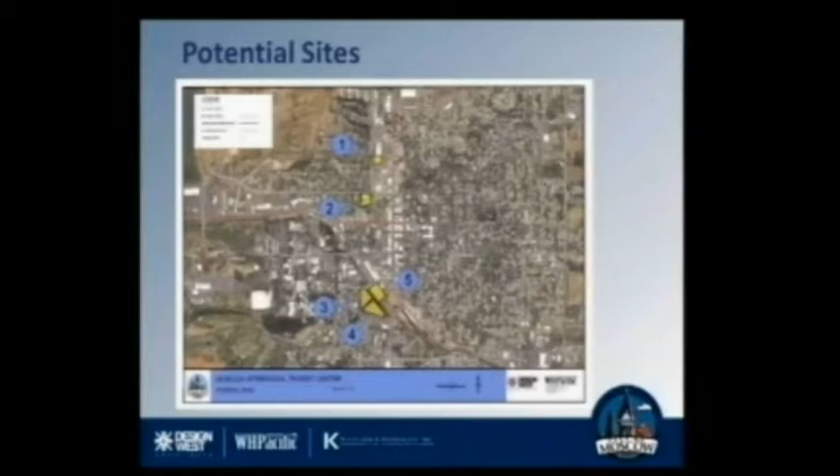We evaluated each one of those in detail, and then the Technical Advisory Committee looked and voted, see your dots there, their preference in regards to the sites. So you can see sites 3, 4, and 5 were really the predominant favorites.

We elected to look at essentially site 3 and 5 as the final 2 that we wanted to look in further detail and do a preliminary design on. Site 3 within the University of Idaho land, and then site number 5 in a recently redeveloped private parcel.

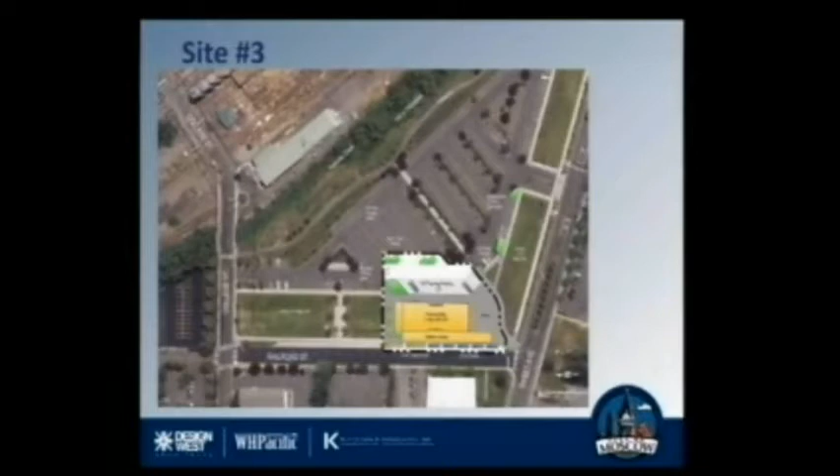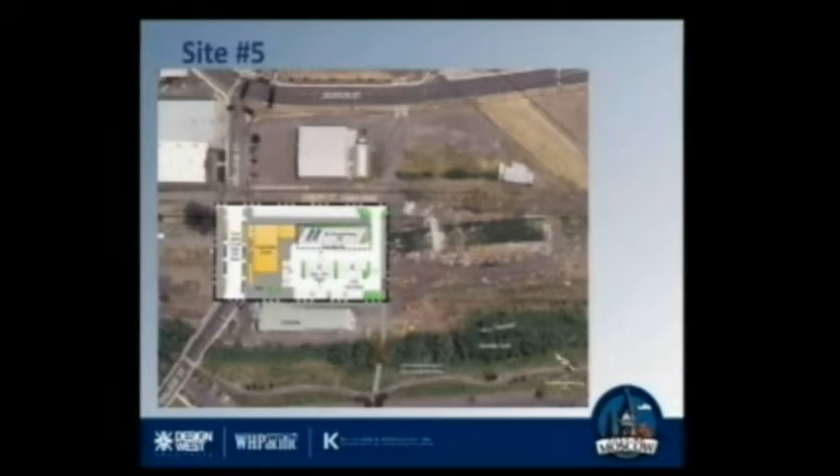So the Technical Advisory Committee then looked at analyzing each of the two sites with some very specific details and abilities, how to accommodate the program, for example, expansion, cost, availability, and what really suited best for the program. The committee selected site number 3.

We have done some further refinements, slight refinements, as we start gaining some input. I think one thing you'll see is that the facility sits fairly lightly onto that existing parking lot area and property. The building sits within a pre-programmed location, very prominent on the intersection coming into the campus there on Sweet Avenue and Railroad.

Nice ease of circulation going through. A lot of infrastructure already right there, set up either in the front street or in the back parking lot areas, and very minimal amount of impact to the existing parking area. So from a site planning standpoint, this site set up very, very well, very nicely.

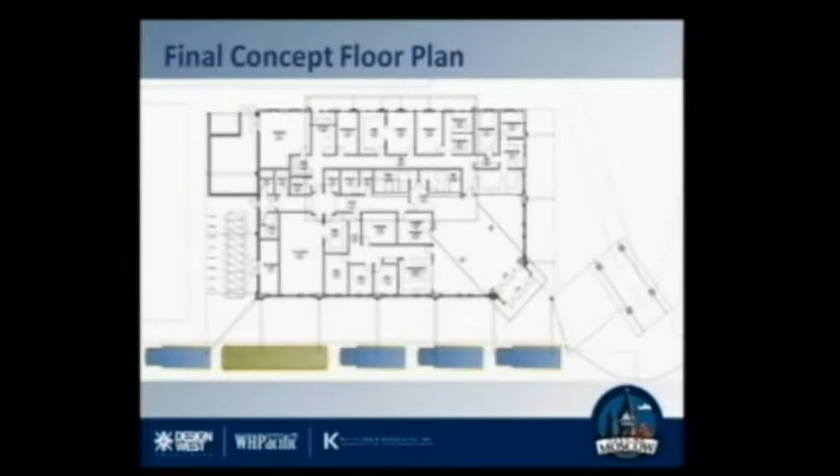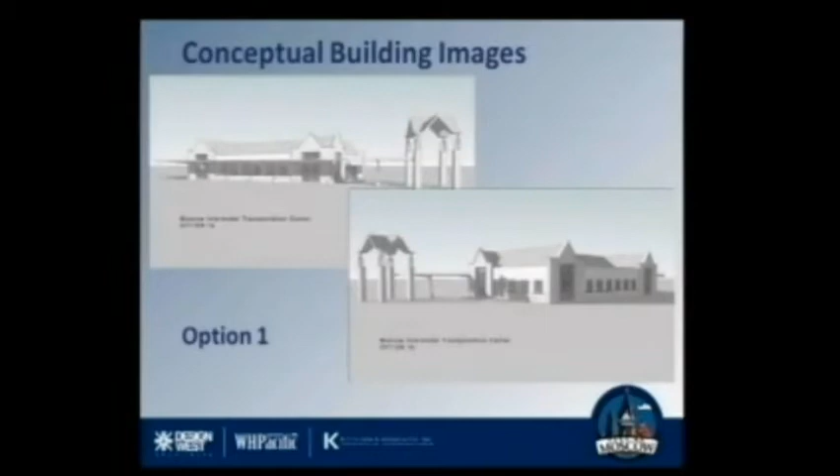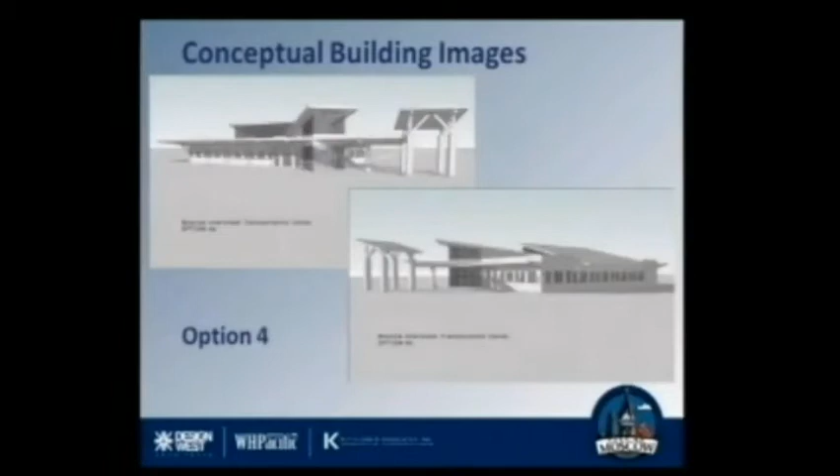To refresh your memory from the last time I addressed the council, we looked at several different building forms that could potentially be the way this building ends up looking, ranging from traditional university forms, to something a little more contemporary, almost bordering on modern or space age, and a few that were in between. Based upon input from the public forum, the TAC committee, and the city council...

As it turned out, option 4 was the one favored fairly heavily. Option 1 did fairly well. Options 2 and 3 didn't really survive too well, but option 4 did quite well.

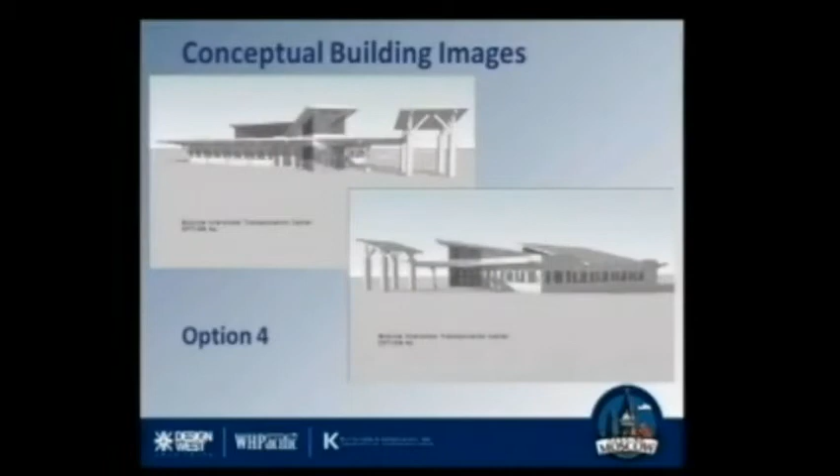In the time we've been away, we've gone ahead and worked a little further on refining this particular design. It's not a dramatic departure from what you've seen before and what we polled the city council on previously, but this one offers a little more information in these renderings as to what the building might look like.

The building's meant to have a contemporary feel. It's meant to make transit appear to be a modern and happening thing here in Moscow, and have a building that has its own identity, yet at the same time respect that it is close to campus. It is part of the expanded downtown core, and so should have materials that look like they belong here in Moscow. And with that, I'll let Bill wrap up the presentation.

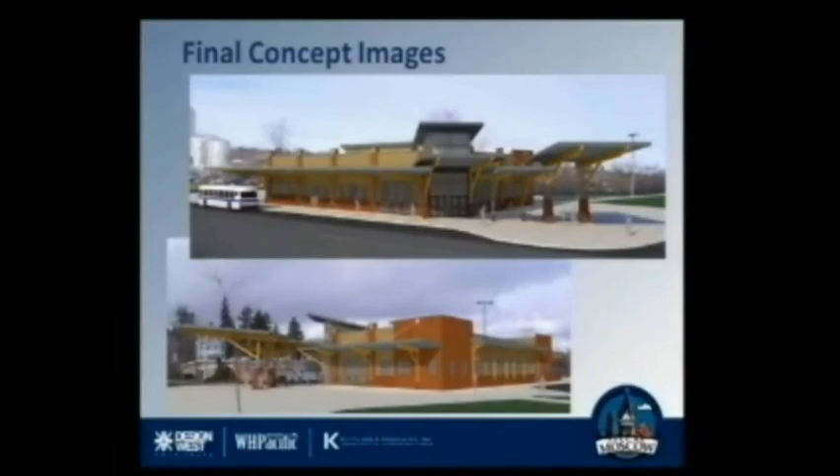Any other comments, questions or useful suggestions? Bill, has final ownership ever been discussed further than what was discussed at the committee meetings? We're still finalizing that at this point in time. I would anticipate probably in the next 2 weeks we will have a final decision or resolution, essentially an agreed upon arrangement between the city and the university. We've been working closely with the granting agency about their expectations of ownership and operation of the facility, and also with the university to understand their desires to make the project the best project it can be.

I think there's a good likelihood that it will change from the last arrangement that was presented or proposed to the council, but we're still in some discussions with the university, and it'd be a little premature to comment on that at this point in time. Thank you.

Anyone else? Okay, Bill, how official does the receipt of this report have to be for purposes of your grant funding? At this point in time, there's no formal action that's necessary from the council. Certainly, anything that we move forward, moving into Phase 2, awarding a contract for professional services for that, and then ultimately for construction, will be formal actions for the council. But at this point in time, just acceptance of the report is acceptable.

Okay, thank you for the report. I would make a motion that we go ahead and accept the report. Second. Awesome, Wayne's motion and Dan's second. All those in favor say aye. Aye. Okay, any opposed? All right, we happily accept that wonderful report. Thank you, quite complete. Thanks for your presentation, even with the awning. That's right, exactly. It's all right, we'll just turn it around.